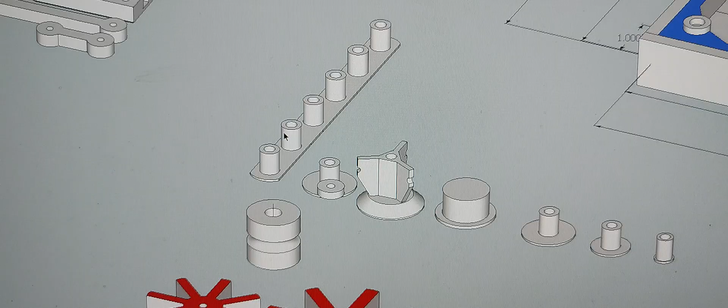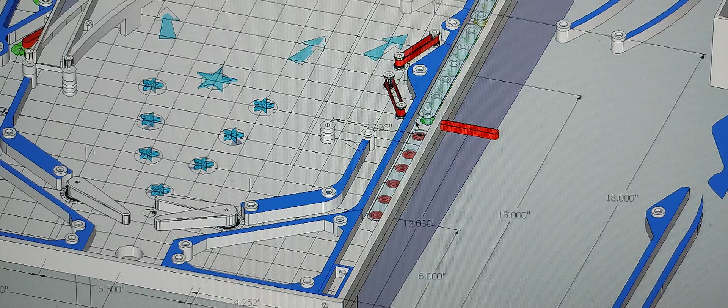So 3 of these would actually take up this whole section here, and that's why you're seeing 3 sections of lenses right on top of those perforations on the base of the machine. From underneath, I can install LEDs with different colors to trigger this, activated by an electronic circuit that simulates a sequential counter or shift register that shifts the LEDs back and forth.

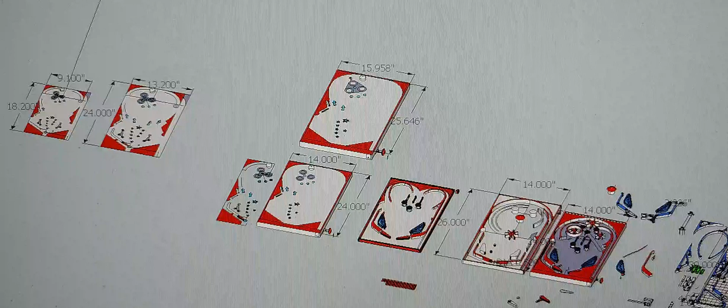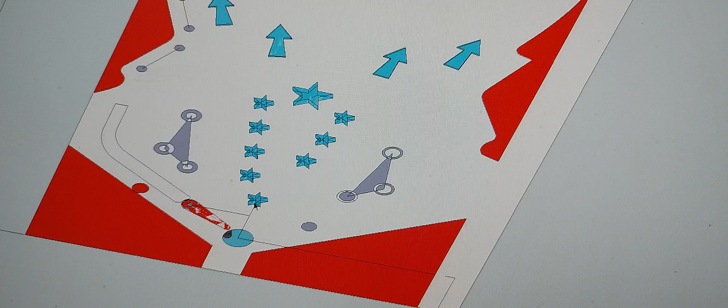They trigger depending on which sensors and contacts you activate, giving 100 points each in 100 point increments up to 1,000.

The lights on this side, where the ball gets kicked from, have a set of 6 lights which go up and down at the start of the game just to get you excited, then remain lit. As the ball runs down the gutter, it diminishes by 1 - from 6 to 5, to 4, to 3, down to no balls, and then the game resets again.

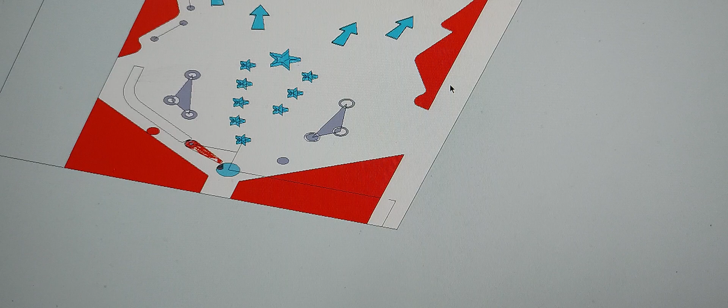So it's very, very simple the way they did this. There's no need for additional 7-segment displays to display the score - you just keep score visually by looking at the stars and the number designation next to the star, in hundreds like I mentioned.

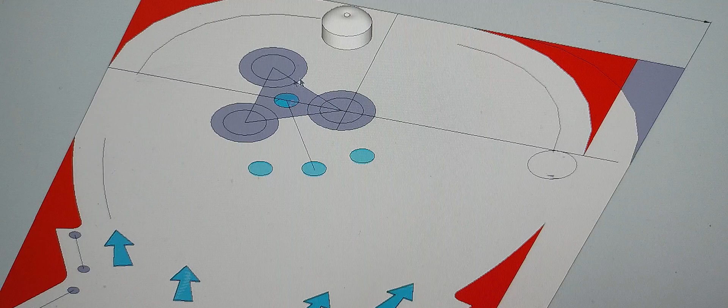I really like the way they did this setup with the bumpers, very simplistic. They have a couple little bells here, and that's the reason why I also have a couple little bells on mine, because it adds to the excitement when the ball hits those bells.

These bells are nothing more than bicycle bells you can buy for little kids, the kind where you pull a little plastic hammer activated by a spring. It hits the bell and bing, it sounds.

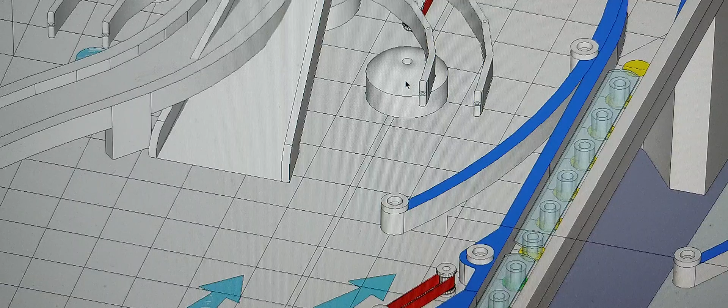I just installed these on the table without the base, directly with a screw through the base. I had to drill 2 little holes on the base of these parts that come with the bells, then attach that to the surface of the table, and it works pretty good.

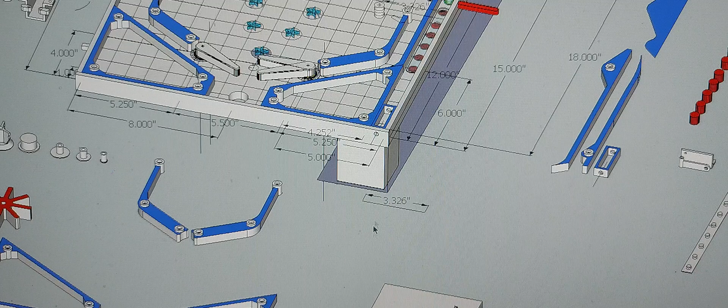The rubber bumpers, as I explained in my other video, I should also cover here since this video is long enough and I may as well complete it. I experimented with a bunch of different types of rubber bumper bands.

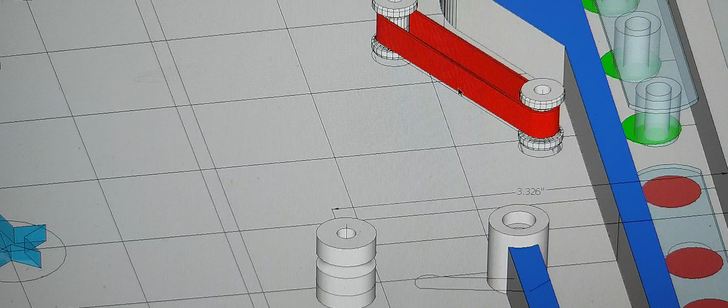I used some PVC tubing to create my own bumpers. I also used what's called stretchy cord that you can buy at Michaels Arts Supply - little kids make bracelets from that material. Stretchy cord varies; some of it is very elastic, and some doesn't have the memory or elasticity.

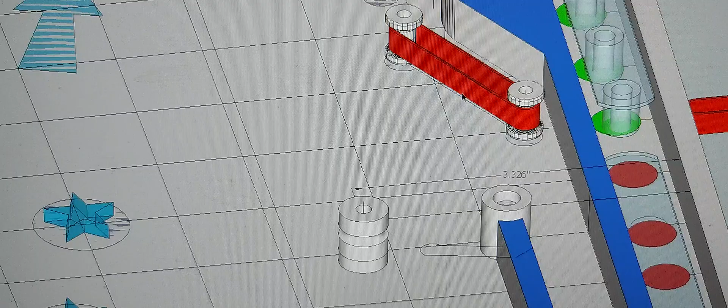If it stretches beyond a point, forget it - you stretch it beyond return. So I've used some of that, but the thing I found works best here is silicone, high temperature silicone.

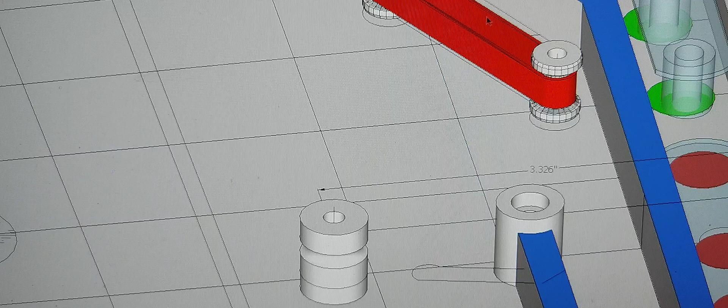I'm using tubing and making my own bands by splicing a length of tubing with another piece of tubing inside it, just to create the splice and retention of that band. I showed that in my other video - check it out. But silicone works the best.

It's got much better spring action, even if you hit it on areas like these posts here, where it tends to be a little harder with the band around the posts. Right here it's easier because there's no support, so the band tends to stretch quite easily.

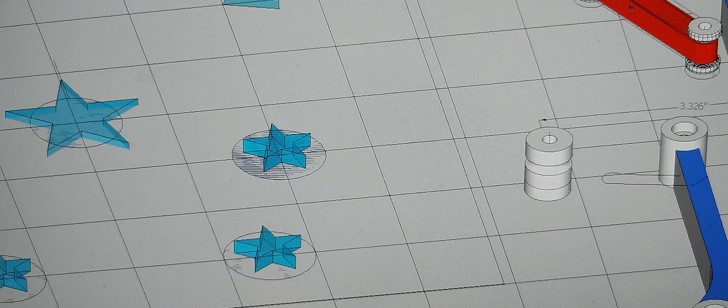But on these parts right here, if the ball hits, and if this material isn't springy enough, it tends to dampen the bounce back of the ball. So just something to keep in mind.

And basically, yeah, this is my machine. So stay tuned for more.